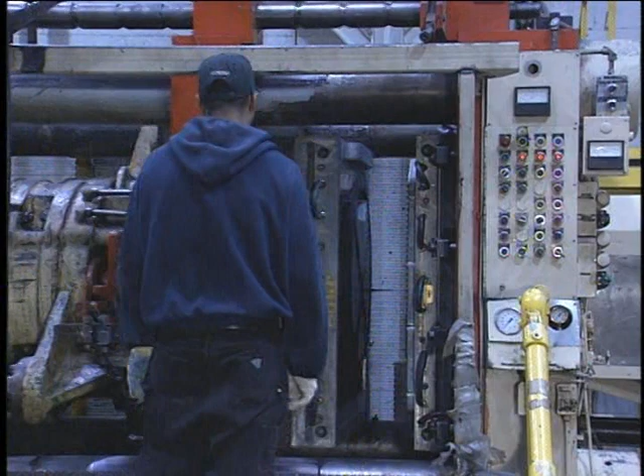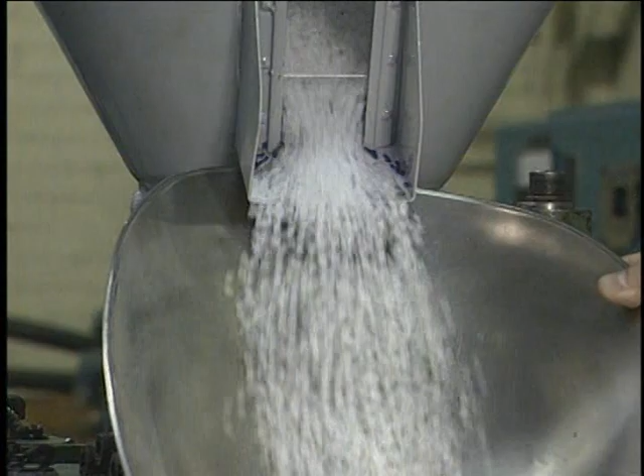To better understand the injection molding process requires understanding some properties inherent in plastic itself. The simplest definition of a plastic is any natural or synthetic polymer that has a high molecular weight.

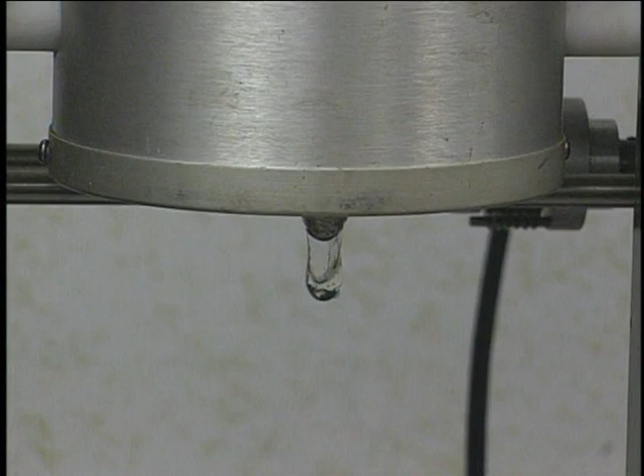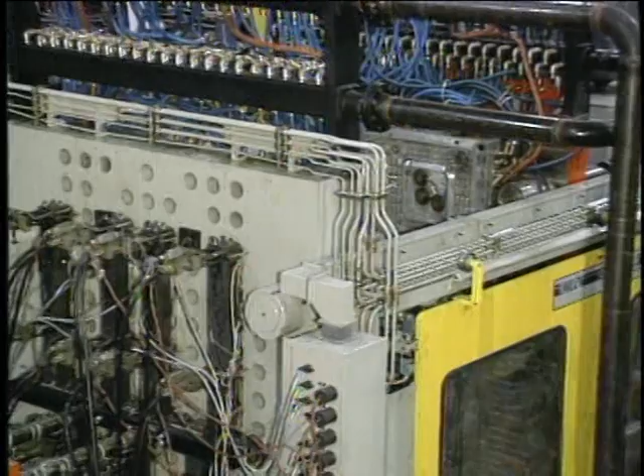There are two types of plastics: thermoplastic and thermosets. Thermoplastics undergo a reversible change from solid to liquid when heated, and can be cooled and reground for reuse over and over again. Thermosets undergo a chemical reaction between two reagents when heated, and achieve their strength through interlocking chemical bonds. Once molded, thermosets cannot be resoftened.

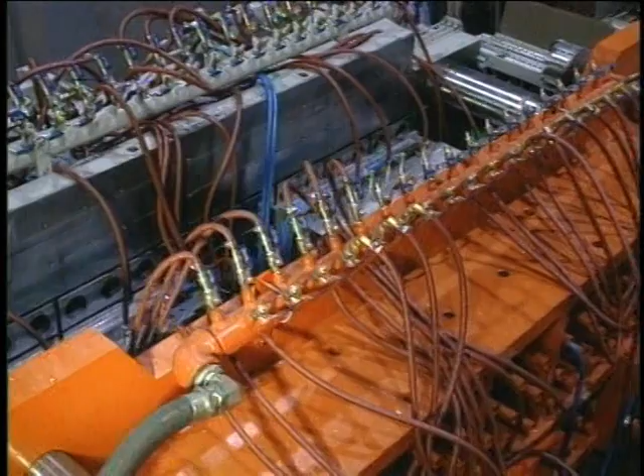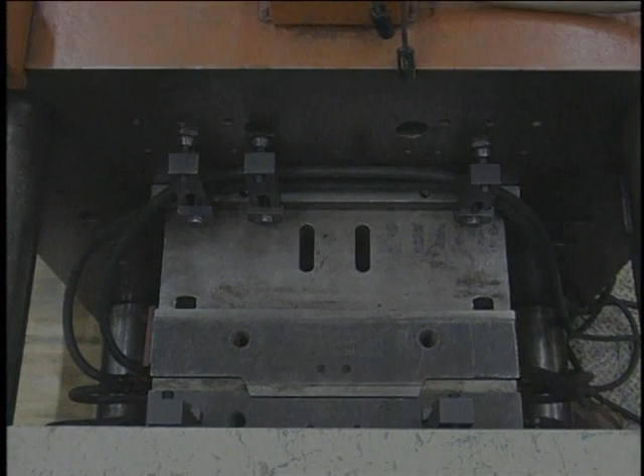While thermosets are injection moldable, most materials used in injection molding machines are thermoplastics. Injection molding plastics is extremely complicated because of the infinitely changing pressure, temperature, and velocity inside the mold. These molding conditions directly affect the properties of each molded part. A change in any of the conditions will alter the parts produced.

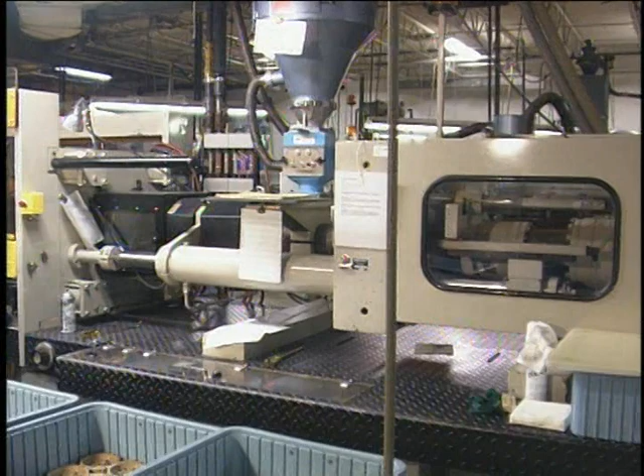There are four primary elements that influence the plastic injection molding process: the molder, the material, the injection machine, and the mold.

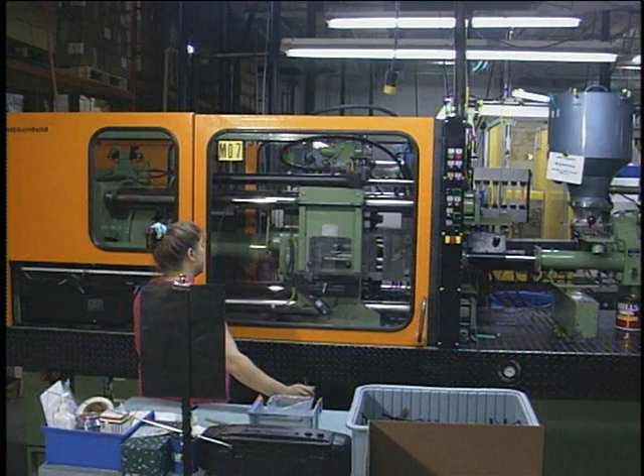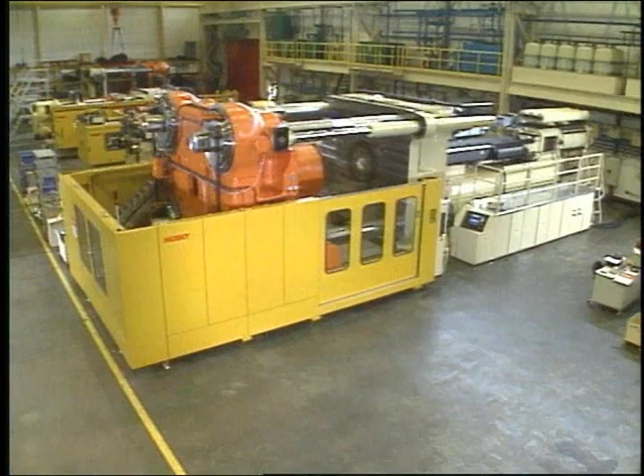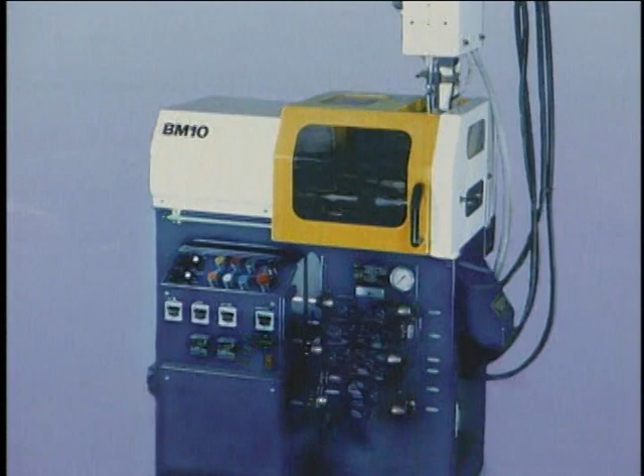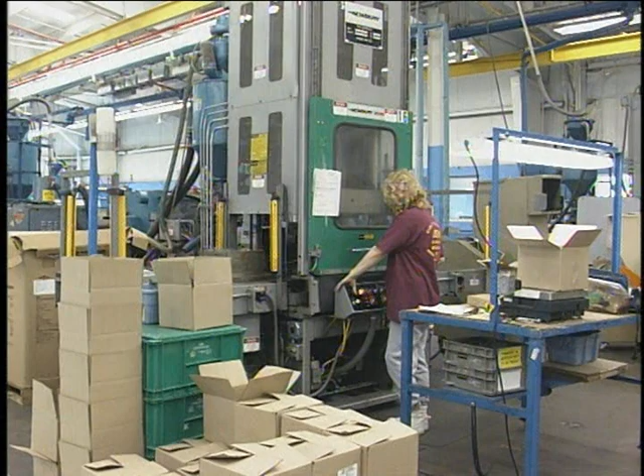There are a variety of injection molding machines in use today. The vast majority of these machines are hydraulically actuated and have 3 platens. But newer styles, such as 2-platen injection molding machines and electric injection molding machines, are now gaining market acceptance. Injection molding machines range in size and complexity from desk-size units up to machines the size of a small house. Most injection molding machines are horizontally oriented, but vertically oriented molding machines are available. These vertical machines are primarily used for insert molding.

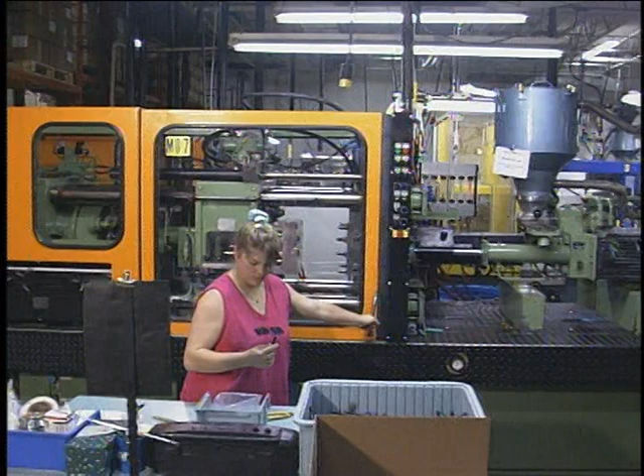All injection molding machines are a combination of 2 systems: an injection system and a clamping system. The injection system heats the thermoplastic material to its appropriate viscosity or flowability and then forcefully injects it into the mold. There are 2 types of injection mechanisms: the reciprocating screw, which is the most common, and the 2-stage screw.

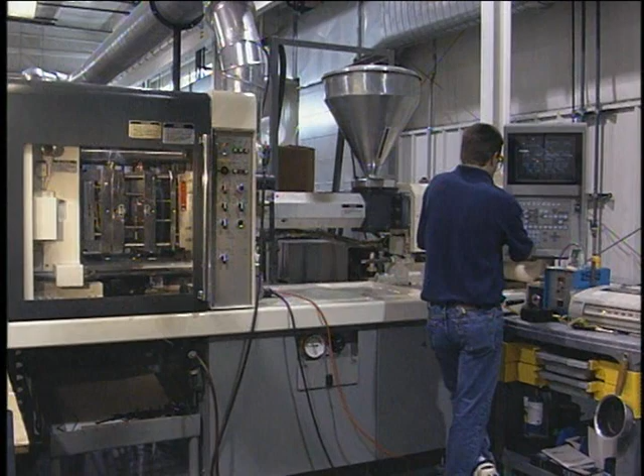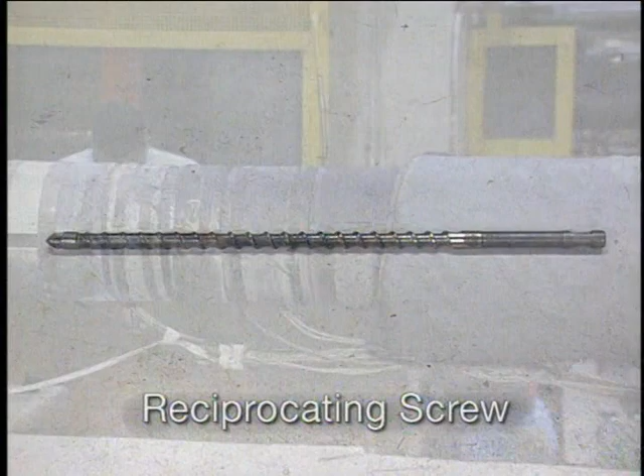The main parts of the reciprocating screw injection system are the hopper, a reciprocating screw inside an externally heated injection barrel, a hydraulic motor, and an injection cylinder.

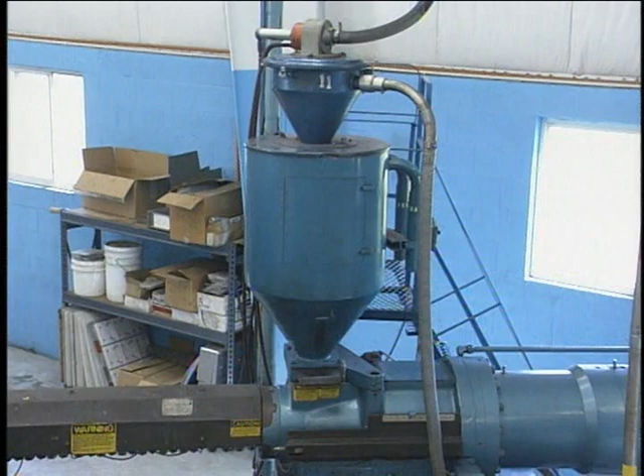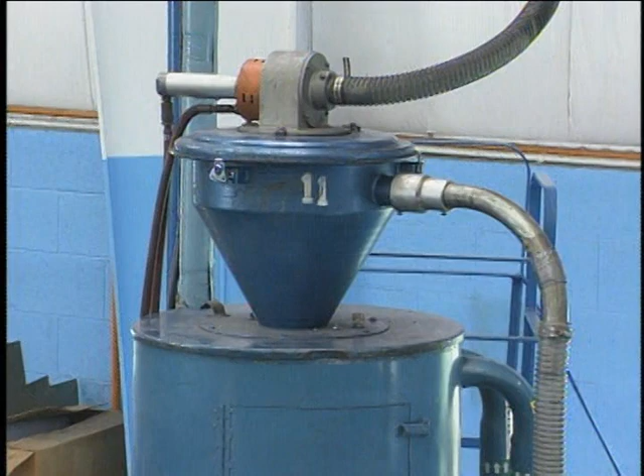Resin material is fed to the injection barrel from the hopper. These hoppers may be filled manually or vacuum-fed automatically, and often have dryers attached to the top to remove the moisture from the material. As the resin enters the injection barrel, it is driven forward by the rotation of the screw, which is powered by the hydraulic motor.

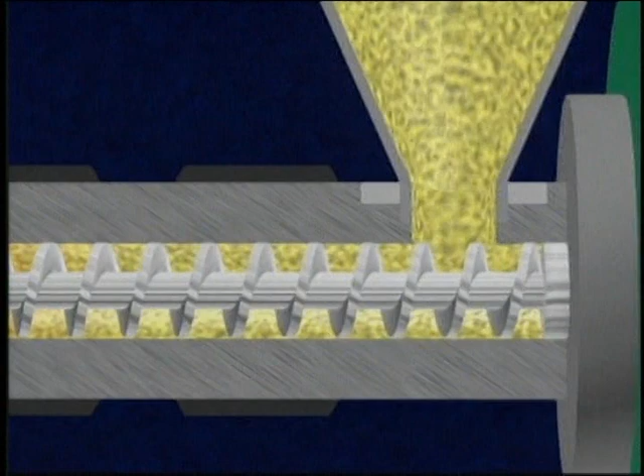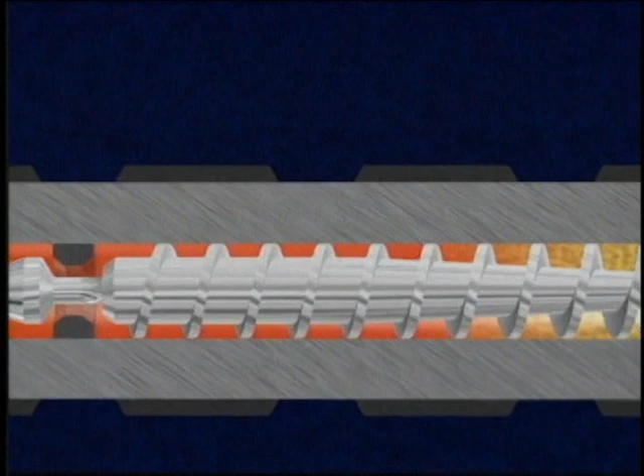The resin plasticizes or melts as the turning screw drags it towards the nozzle end. This is referred to as drag flow. Drag flow causes the polymer molecules to slide over each other, creating frictional heat, which melts the material.

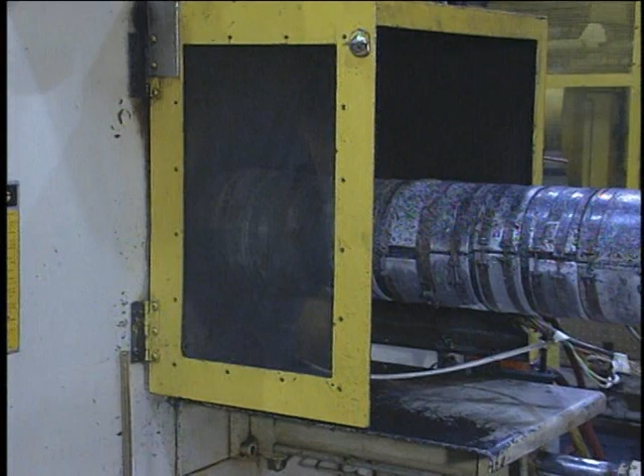External heating bands provide additional heat to the injection barrel. The heating bands bring the material to its final temperature and compensate for the radiation heat loss. The temperature is controlled by 3 thermocouples in the barrel and 1 in the nozzle.

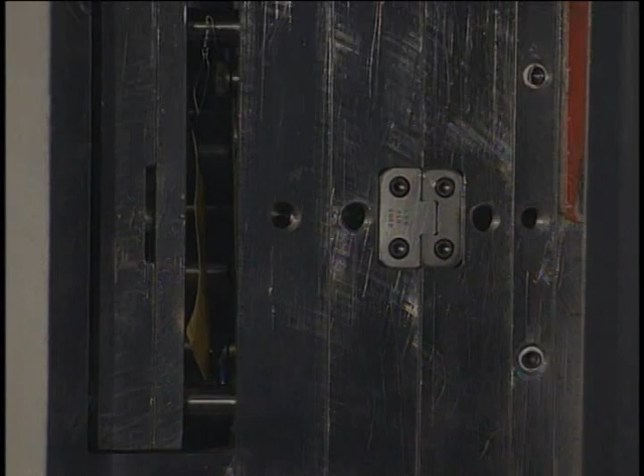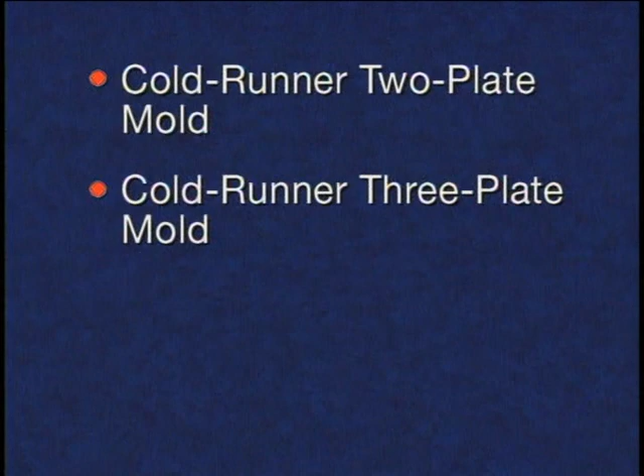Over time, many different mold designs have been developed that meet specific injection molding requirements. These mold designs include the Cold Runner 2-plate mold, the Cold Runner 3-plate mold, the Hot Runner mold, and the Insulated Runner mold. The Cold Runner 2-plate mold consists of 2 plates with the mold cavity and core mounted on them.

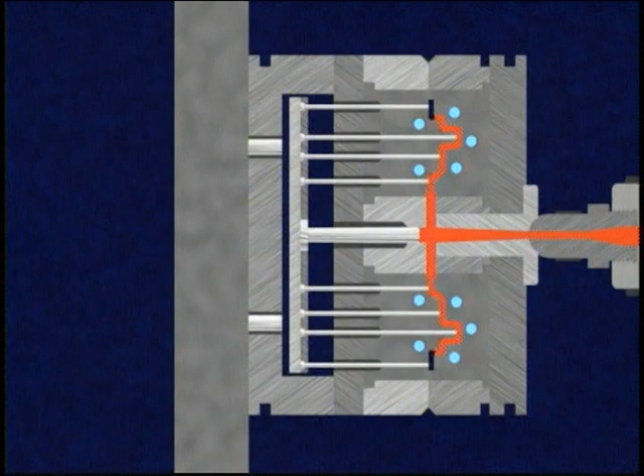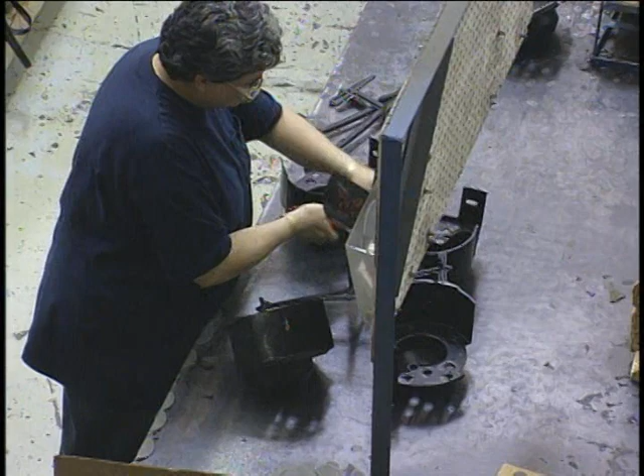The Cold Runner system molds the sprue, runners, and gate along with the parts. After ejection, the parts are separated and the rest reground.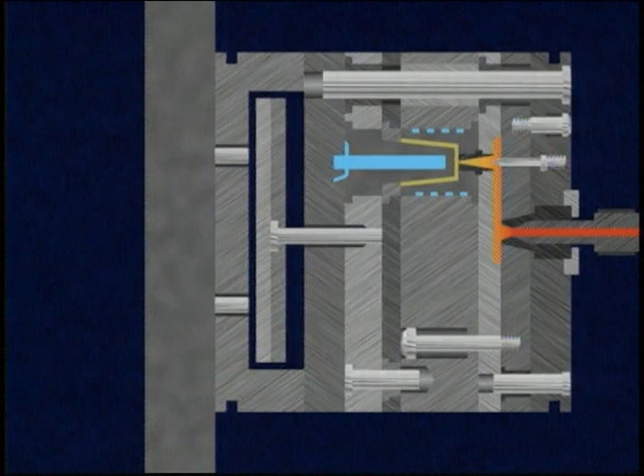The Cold Runner 3-plate mold uses 3 plates to mold the part. These plates include the stripper plate, which contains the sprue, the middle or cavity plate, which holds the cavity, runner, and gate, and the movable plate, which holds the molded part. This type of cold runner mold design automatically separates the runner system from the part as the mold opens and is very easy to automate.

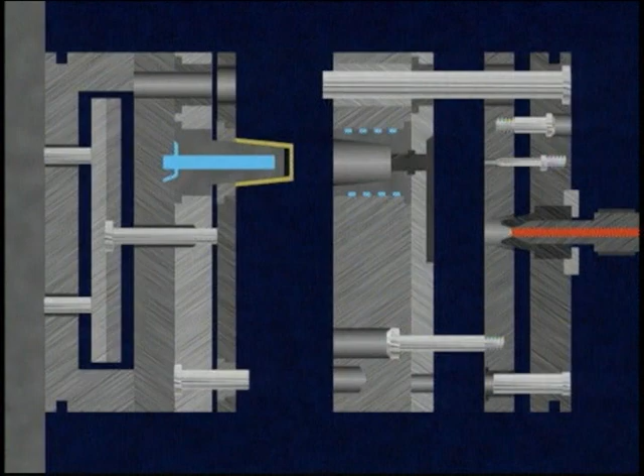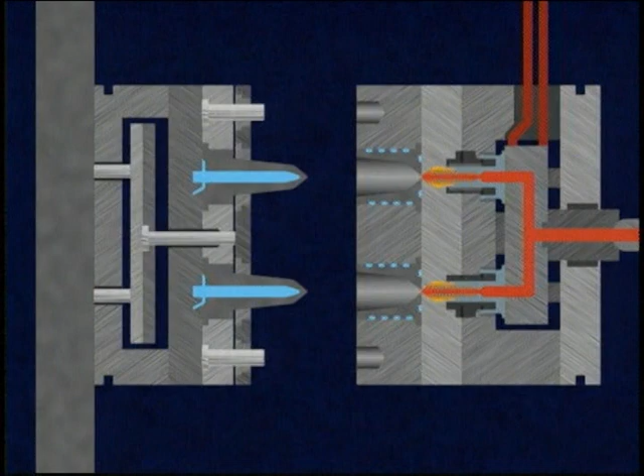The hot runner mold uses an electrically heated manifold that keeps the molten thermoplastic in the runners at the same temperature as the heating cylinder. The heated runner system is contained in a plate of its own and does not open during the molding cycle. Because of this, hot runner molds generate no runners or sprues. For this reason, hot runner molding, also known as runnerless molding, is fast and efficient.

The insulated runner mold is much like the hot runner mold, but it uses a large diameter runner. During injection, the outer surface of the runner freezes. This insulates the center material, keeping it at the molding temperature.